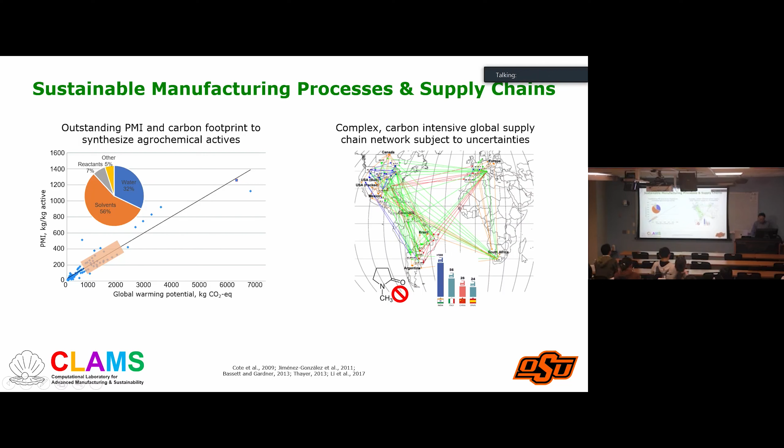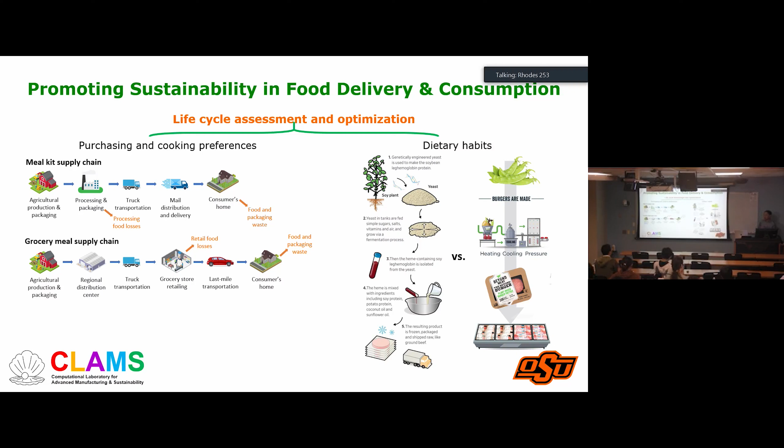In the third stage, I'm planning to develop AI-based precision farming tools to help farmers make rational, informed decisions on which crop they should grow, what the expected crop yield is, and how to effectively monitor and improve crop health. So for example, my group is working on the sensor-based optimization and integrative learning of soil monitoring for sustainable agricultural irrigation, thereby bringing eyes inside the soil.

And then lastly, I would like to promote sustainability and identify ways to minimize food waste, water and energy use, as well as carbon footprint during food processing and consumption stages, in which some of the ongoing shifts in dietary habits and cooking preferences have raised several interesting questions. And in particular, we developed systematic life cycle assessment and techno-economic analysis tools to analyze and optimize the meal kit delivery market and plant-based meat substitute market.

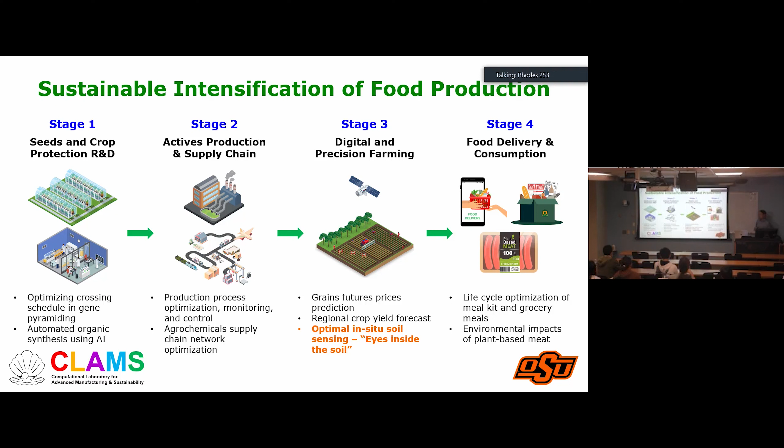And to make things worse, in a lot of these places, the groundwater resources suffer from high salinity content as well. In other words, high-quality fresh water is a scarce strategic resource for agricultural irrigation in the U.S. To address the irrigation water stress, one important water management practice is to reduce freshwater use by adopting non-traditional marginal quality water, such as treated produced water from oil and gas production, and brackish groundwater for agricultural irrigation.

And this is especially attractive to large agriculture producing states like Texas and California, regions where brackish water constitutes a high proportion of groundwater resources, such as eastern Arizona, and rural communities in arid regions with limited access to fresh water like southwestern Oklahoma.

While most farmers have demonstrated a strong will to adopt marginal quality water for agricultural irrigation, they currently don't actually have adequate information to monitor the impact of agricultural water quality or salinity on crop health and yield. Instead, condition of crop, feel of soil, and personal calendar are the top 3 methods U.S. farmers use to schedule their irrigation activities, which in the case of using marginal quality water will result in soil salinity issues, as crop damage is often noticed long after the salinity development occurs.

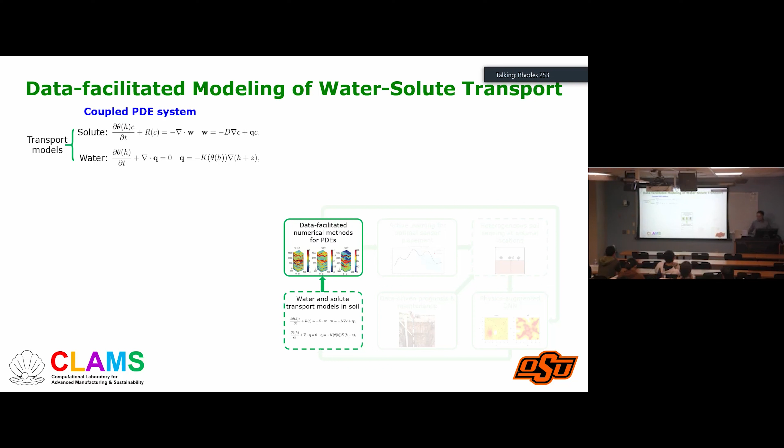And this coupled PDE system is known to be challenging to solve because of the nonlinearities in the water retention curve and the hydraulic conductivity function that are embedded in the PDE system. So here we have come up with novel data-facilitated numerical methods that holistically integrate finite volume discretization, adaptive linearization scheme, neural networks, and global random walk theory to produce accurate numerical solutions of the coupled PDE system with provable convergence guarantee.

One of the novelties of this numerical method is that we introduce neural networks to learn the mapping and inverse mapping between water pressure head and the number of particles in the global random walk formulation. And we propose a new coarse-to-fine approach that allows high-accuracy numerical solutions to be obtained without the need for high-accuracy, fine-meshed training data. So therefore, this coarse-to-fine approach maintains a very good balance between computational efficiency and solution accuracy.

And we also conducted systematic studies comparing the numerical accuracy and mass conservation performance of different numerical solvers, and showed that ours can accurately reconstruct the underlying physical laws relating soil moisture, salinity level, water pressure head, and water flux, which are often lost after the discretization process.

So once we have this numerical method for solving this physics-based model, it is incorporated in the physics-constrained active learning framework to identify optimal sensor locations in a sequential manner, as well as in the data-driven, physics-augmented deep learning framework to construct accurate field-scale soil moisture and salinity maps across the entire field.

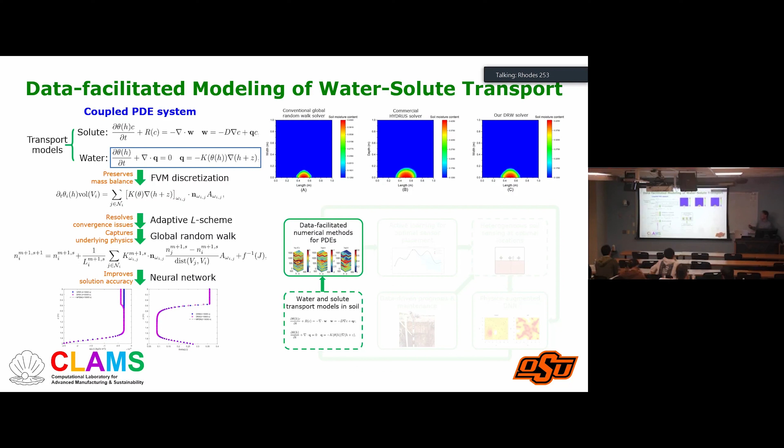So as mentioned earlier, in-situ sensors can only measure soil moisture and salinity profiles locally, while deploying sensors at high densities over a large crop field is economically and practically infeasible. And therefore, we must deploy a sensor network at strategic locations.

And we collaborate with Professor Bing Yao from the University of Tennessee and Professor Jiang Xie at UVA to develop an optimal sensor placement algorithm based on active learning to identify a subset of three-dimensional locations for placing the in-situ soil sensors such that the soil moisture and salinity estimation error is minimized. And we model the random variables describing the soil moisture and salinity at any location and time as a spatial-temporal Gaussian process with sensing noise.

And the set of hyperparameters in the kernel functions and standard deviations can be estimated by the maximum likelihood method based on direct sensor measurements. On top of this purely data-driven Gaussian process model, we can introduce a physics-constrained spatial Gaussian process modeling framework that incorporates the water and solute transport models. And this is combined with space filling design and physics-based uncertainty measures to sequentially place the soil sensors.

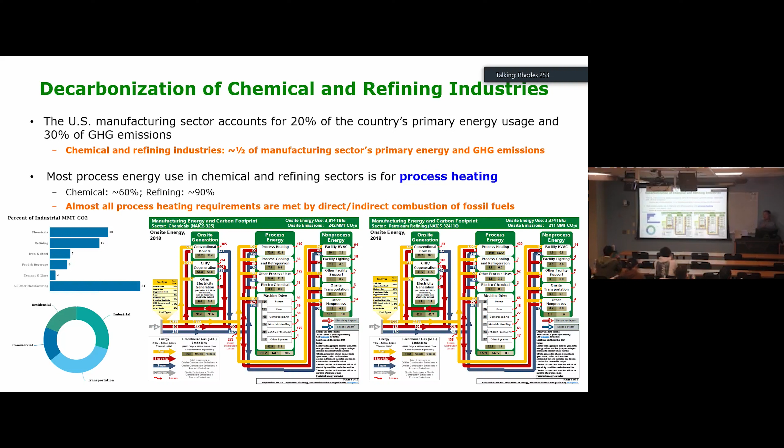So historically, for process heating applications, there has been a choice of whether to use heat from the combustion of fossil fuels or to convert the combustion heat to electricity and then use the generated electricity. In this case, the extra cost and the efficiency loss due to conversion to electricity had to be balanced against the process synergy, as well as the ease or inconvenience of using the combustion heat directly. However, as the US energy landscape continues to shift towards decarbonized electricity, mostly solar and wind, the energy can be directly harvested as electricity, which makes it worth examining the potential impact of replacing combustion heat with electricity.

And this critical need to decarbonize chemical process heating via electrification creates many exciting opportunities for systems engineering research. In fact, DOE has been pushing very hard in supporting and accelerating this ongoing trend, and this includes the establishment of the Industrial Heat Shot within the Energy Earthshots, the new Institute for Electrification of Process Heating, the publication of the Industrial Decarbonization Roadmap, as well as the announcement of several large multidisciplinary funding opportunities.

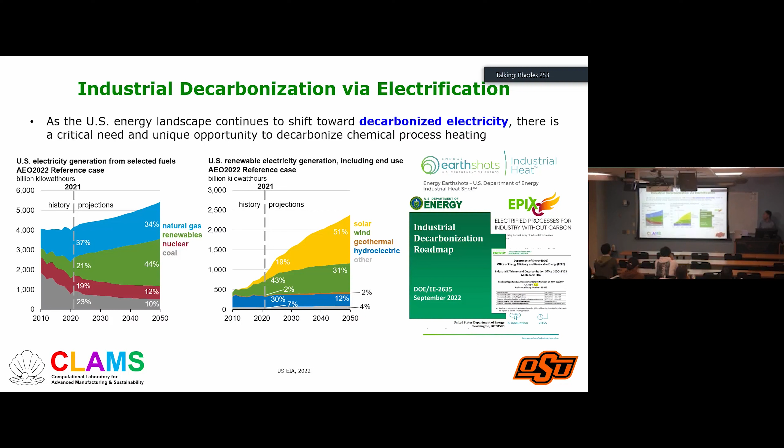One of the key chemical manufacturing processes that attracts a lot of attention from both industry and academia is steam cracking. Steam cracking is the most prevalent petrochemical process to break down hydrocarbons, such as natural gas, into more valuable unsaturated hydrocarbons, such as ethylene and propylene, which are the building blocks of nearly every chemical product that we use every day. Steam cracking units around the world produce over 150 million tons of ethylene and propylene every single year. And since this reaction is highly endothermic, a huge amount of heat is required to crack the hydrocarbons.

And based on our extensive survey of all 26 active steam cracking units operated in Texas, the average heat duty required just for the reaction part is 87 megawatts per unit. And it is estimated that steam cracking itself consumes 8% of the total primary energy in the chemical industry.

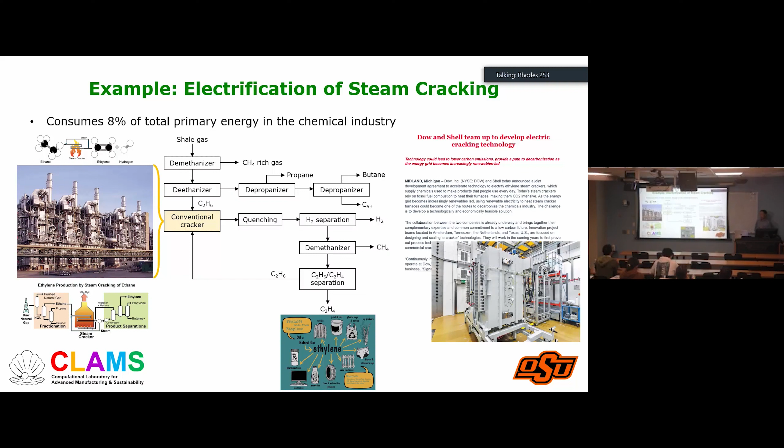And as chemical companies are setting ambitious sustainability goals and greenhouse gas emission reduction targets, active research is underway to replace the cracking furnace powered by burning fossil fuel with an electrified furnace. So for example, in June 2022, Dow Chemical and Shell announced that they started up an experimental facility for an electrified cracker in Amsterdam.

Historically, for economic reasons and for the ease of use of a central boiler to produce steam to supply heat at multiple locations in the plant, fuel combustion has been the norm for heat supply in chemical and refining industries. If all of this heat was to be provided by extensive resistive electrical heating, this would actually translate to roughly 36% of the US electricity generation. Such a large power demand for just the heating applications is not going to work out. It will put a huge strain on electric power infrastructure.

Furthermore, if all this additional electricity were to be produced by natural gas power plants, then due to the efficiency of modern power plants being in the range of about 50 to 55%, the net amount of fossil fuel combusted would nearly double, leading to an equivalent doubling in the greenhouse gas emissions.

One method to reduce the environmental impact of using electricity for heat is to do so with variable renewable energy, or VRE, such as solar and wind. However, the variable nature of VRE presents a new challenge due to the requirement of significant electricity storage, as most of the large chemical plants operate 24 hours around the clock.

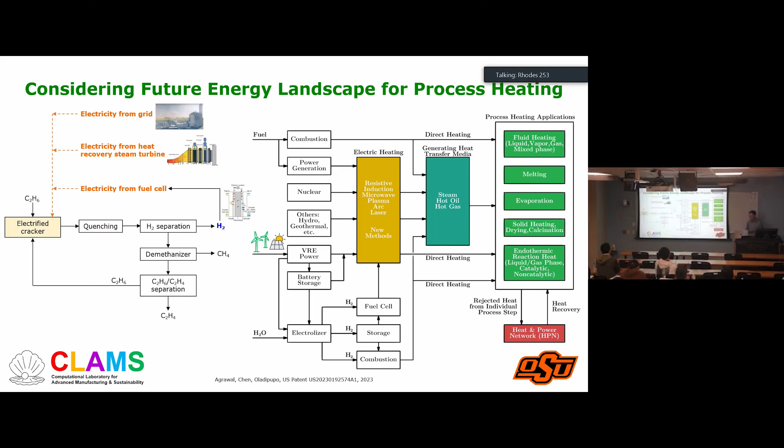Well, most of the decarbonization research has been focusing on electrifying the chemistry or the reaction part. In many chemical manufacturing processes, the most energy-intensive part actually comes from the separation. It is known that separation processes account for 40 to 70% of overall energy consumption in chemical plants and refineries. And among all the unit operations used for separation, distillation has been the predominant choice. Today, 90 to 95% of all liquid separations are carried out using distillation.

Our previous findings indicate that heat pump assisted distillation, which uses electricity to upgrade the heat released from the condenser and supply it to the reboiler, can significantly bypass the energy efficiency barrier of conventional steam-driven distillation. Also, compared to directly using electricity to supply heat at the reboiler via resistive heating, the use of a heat pump can actually reduce the overall electricity demand by 67 to 97% for many industrial separations.

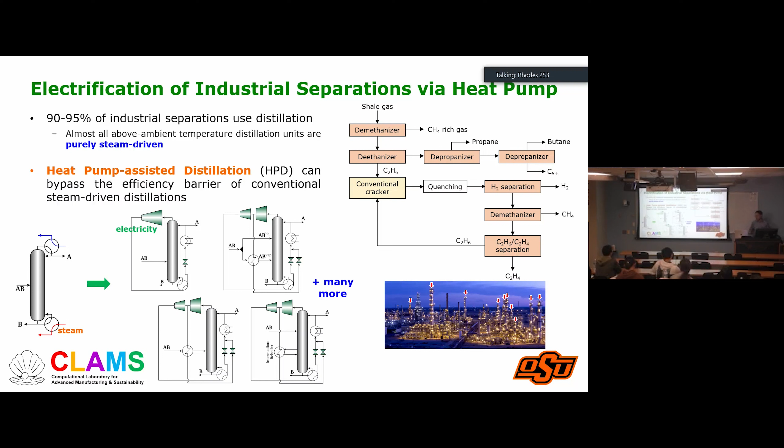And despite the significant energy savings and greenhouse gas emission reduction benefits, the use of above ambient temperature heat pump assisted distillation has been actually rare. And therefore, neither the operating experience nor the method or tools needed to synthesize, design, and optimize heat pump assisted distillation systems is actually available.

And this is first because the number of possible heat pump assisted distillation schemes grows combinatorially with the number of components to be separated. And so far, there has not been a systematic method to enumerate all possible schemes and identify the complete search space. And furthermore, identifying the best heat pump distillation scheme from an immense search space, as well as finding the best operating conditions, is virtually impossible due to the complexity of the resulting complex MINLP problem, let alone simultaneously accounting for the plant-wide energy integration scenarios.

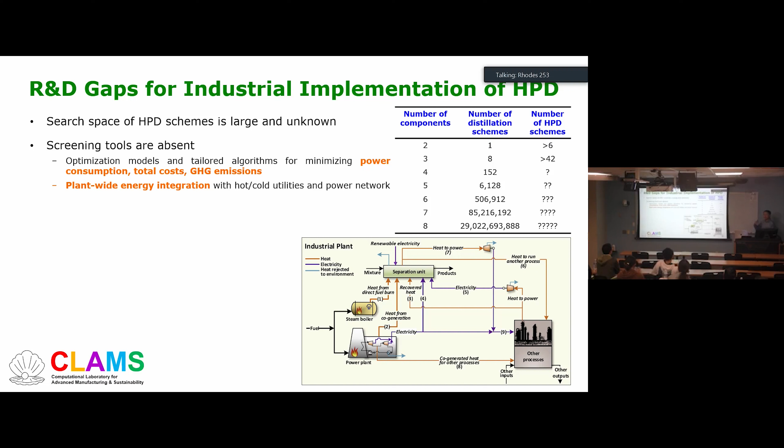So recently, we successfully developed accurate surrogate mathematical models for characterizing the separation behavior of heat pump assisted distillation systems and calculating their energy requirement. And this allowed us to come up with tailored solution algorithms, bound tightening constraints, and tight relaxations to solve the complex optimization problem in terms of minimizing the energy consumption, greenhouse gas emissions, and total costs.

The third reason why the heat pump assisted distillation is not widely used is because, like conventional chemical plants, electrified process units are susceptible to various disturbances and faults during operation. So for example, for distillation operation, even slight disturbances can cause the column to deviate from the designed optimal operating window, thereby deteriorating its energy efficiency and even causing safety incidents.

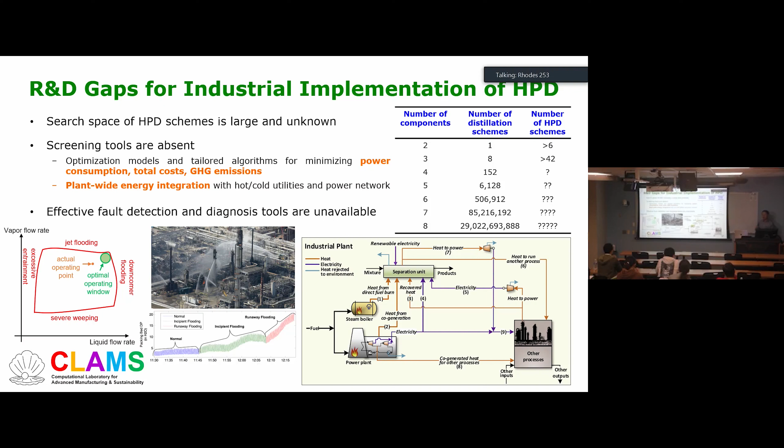However, current plant supervisory and alarm management systems rely heavily on the operator's experience, which is of course limited as faults are often noticed long after they have occurred. So online plant monitoring is often tricky, mainly because, number one, fault scenarios are very complex, and number two, the sensors continuously produce massive arrays of big data streams that are often non-parametric, meaning that the data streams may not follow any particular distribution, and heterogeneous, meaning that the data streams may not follow the same distribution.

So to target these two challenges, we developed a novel fault detection and diagnosis framework called FARM, for fast, accurate, and robust monitoring, that outperforms state-of-the-art algorithms. Unlike existing general-purpose process monitoring frameworks, FARM's unique hierarchical architecture successfully bypasses the intrinsic trade-off between fault detection speed and accuracy that is present in existing process monitoring algorithms.

And in terms of fault detection, we propose new multivariate statistical process control techniques for fast anomaly detection of non-parametric heterogeneous data streams. And furthermore, in this framework, plant operators can choose a user-specified false alarm rate based on their expert knowledge of the process. And in terms of fault diagnosis or classification, we're looking at building a GNN-based approach to learn the directed graph abstracted from the evolution of sensor data streams with detected mean shifts.

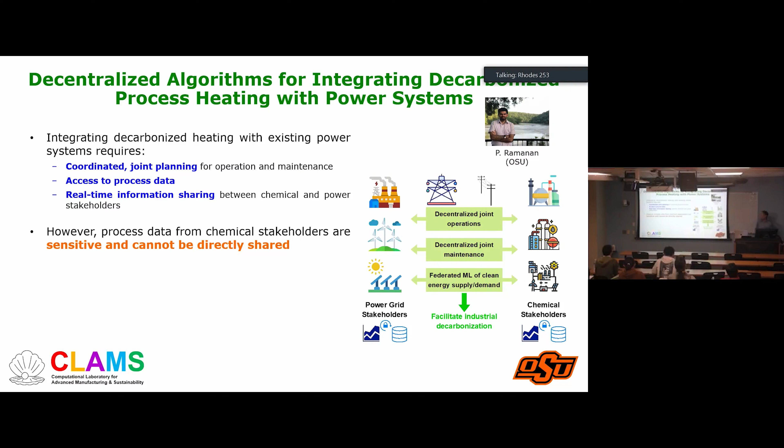Saba worked on the stochastic optimization of agrochemical supply chain networks, and she's currently working on the microgrid scheduling problem for decarbonized chemical plants. And Ali Raza is working on online process monitoring and optimal control of batch crystallization processes. And Zheyu is working on data-driven physics-augmented in-situ soil sensing. And Magdad is working on computational fluid dynamics and its applications in chemical leakage detection.